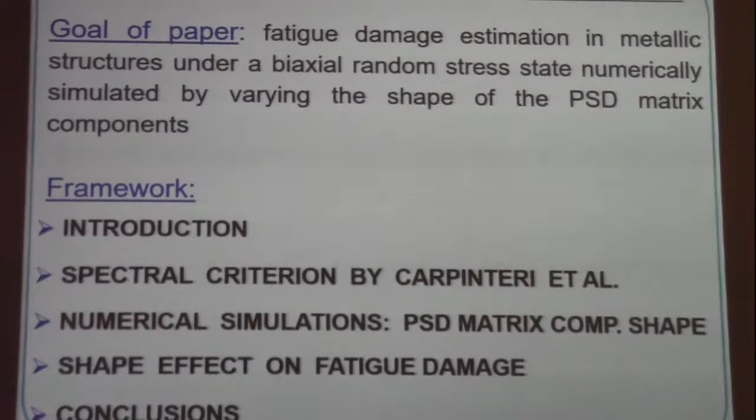The procedure usually employed in fatigue assessment of metallic structures under multi-axial random loading can be formulated in time domain or alternately in frequency domain. Time domain procedures are based on cycle counting methods and damage accumulation rules, and require knowledge of the time histories of the local stress-strain tensor components. Note that many records are needed to obtain reliable parameters of the loading process.

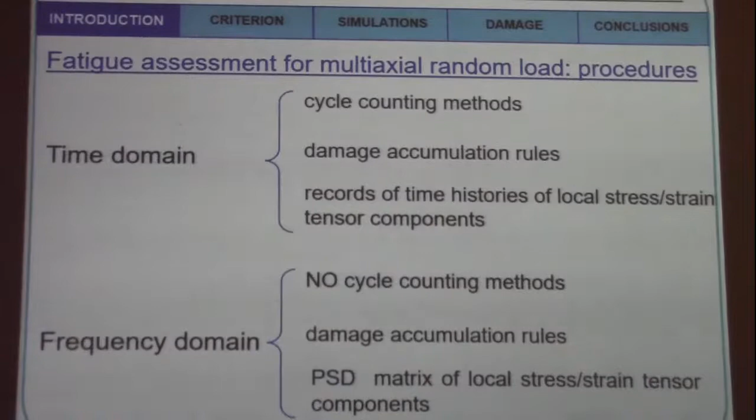Frequency domain procedures instead require no cycle counting methods. They need a damage accumulation rule, and starting from the power spectral density matrix of the local stress-strain tensor components, an evaluation of the fatigue damage can be directly obtained.

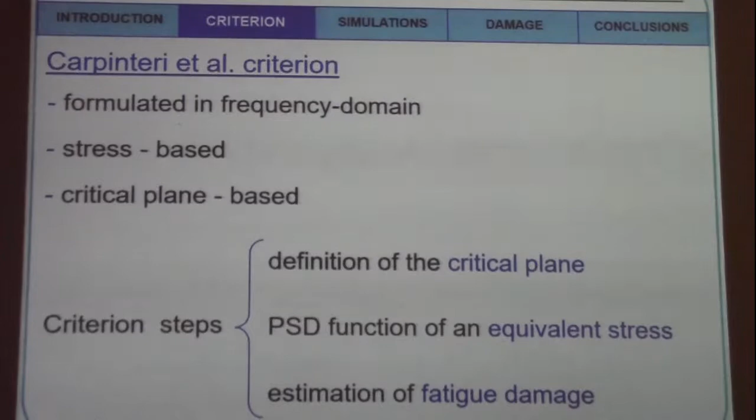The criterion here employed to estimate the fatigue damage, proposed by Carpinteri et al., is formulated in frequency domain and is a stress-based critical plane criterion consisting of three steps: definition of the critical plane, power spectral density function evaluation of an equivalent stress, and finally estimation of fatigue damage.

In order to determine the orientation of the critical plane, let us consider a material point P in the structural component subjected to a general multi-axial random loading. The stress tensor at point P with respect to the fixed frame XYZ is as reported.

By assuming that the random features can be described by a six-dimensional ergodic stationary Gaussian stochastic process with zero mean value, the power spectral density matrix at point P is as shown, where the coefficients are defined by means of the auto and cross correlation functions of the stress tensor components, where omega is the pulsation, lowercase t is the time, and capital T is the observation period.

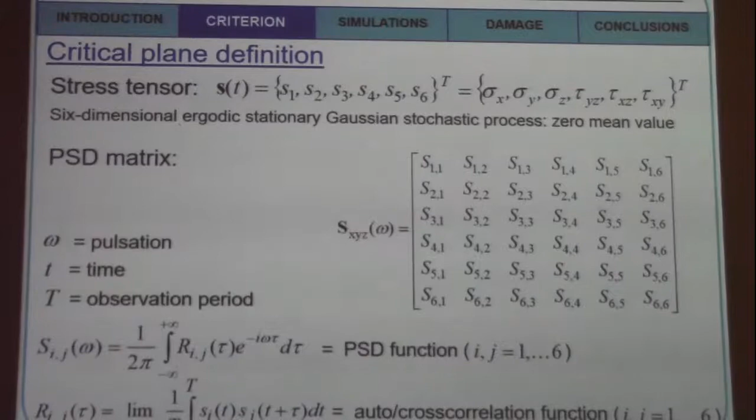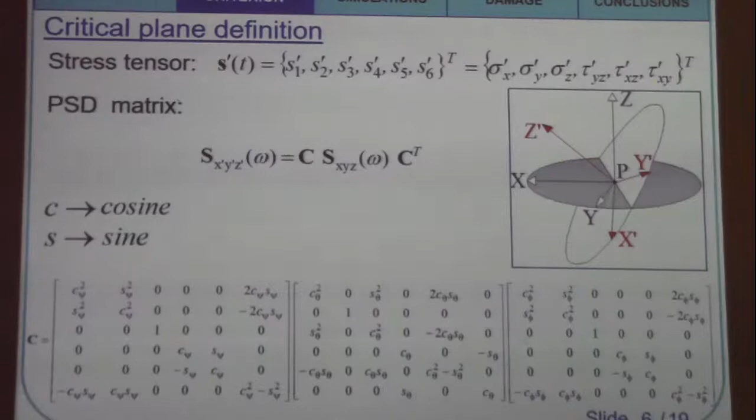Now let us consider a rotated frame, x prime, y prime, z prime, defined by the three Euler angles. The power spectral density matrix at point P with respect to such a frame can be computed using the rotation matrix C, reported at the bottom, where C stands for cosine function, S stands for sine function, and each subscript represents one of the three Euler angles.

The rotated frame x prime, y prime, z prime is assumed to be linked to the principal stress directions at point P. Since such directions are time-varying under random loading, we propose to define the following average principal stress directions: phi and theta are made to vary so that the direction z prime will experience the maximum of S3 prime in a statistical sense, where such a condition is shown, and where lambda 0 is the spectral moment of order 0 of the power spectral density function S3 prime.

nu 0 plus is the expected rate of mean zero-upcrossings of the stress S3 prime, and lambda 2 is the spectral moment of order 2 of the function S3 prime, 3 prime.

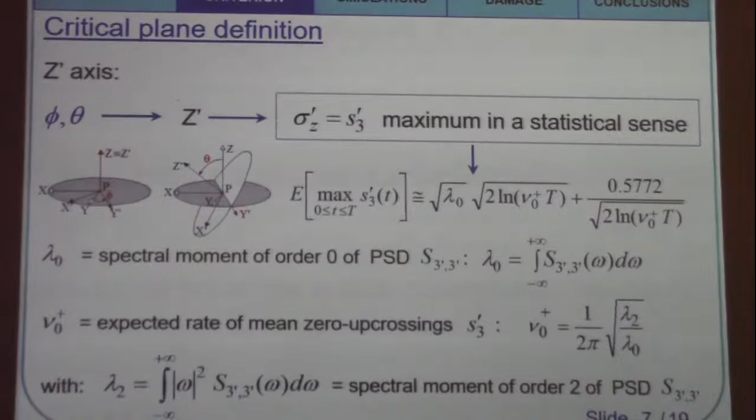The angle psi is made to vary in order to maximize the variance of the stress S4 prime. Note that the directions Z prime, Y prime are regarded as the average principal stress directions, 1-hat and 3-hat, and consequently the direction X prime is regarded as the average principal stress direction 2-hat.

The normal W to the critical plane is defined by the off-angle delta, being delta a clockwise rotation about axis 2-hat, and it is a function of the fully reversed shear and normal stress fatigue limits. Note that such a procedure agrees with the concept adopted in the original version of the criterion proposed by Carpinteri et al. for cyclic loading.

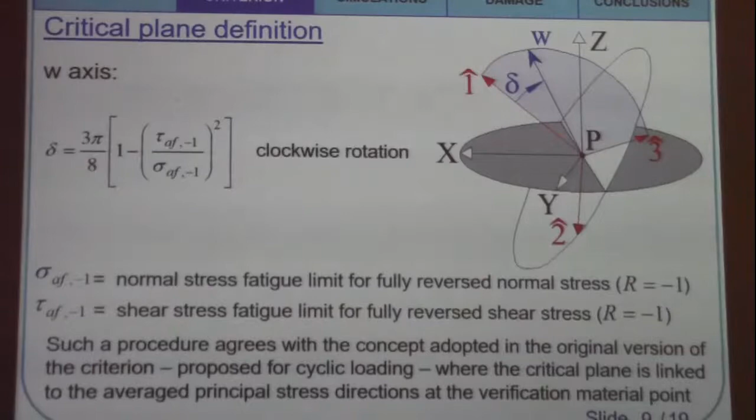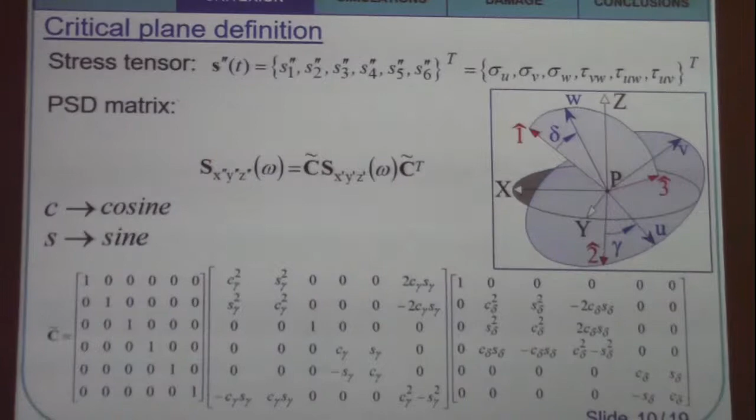And gamma, and consequently the direction U, is made to vary in order to maximize the variance of the stress S4''. The V-axis is finally normal to U so that U, V, W form a right-hand orthogonal frame.

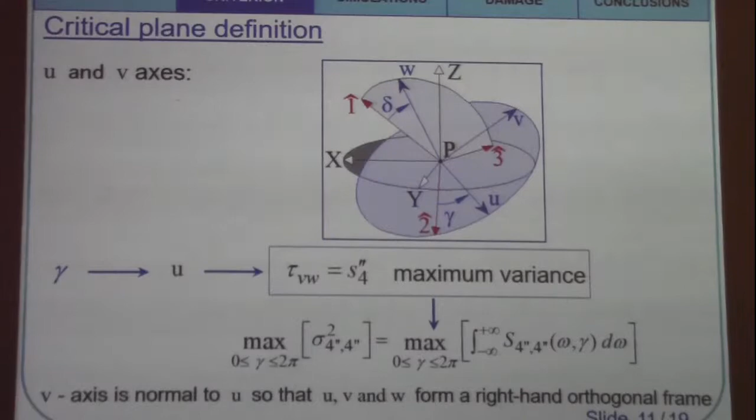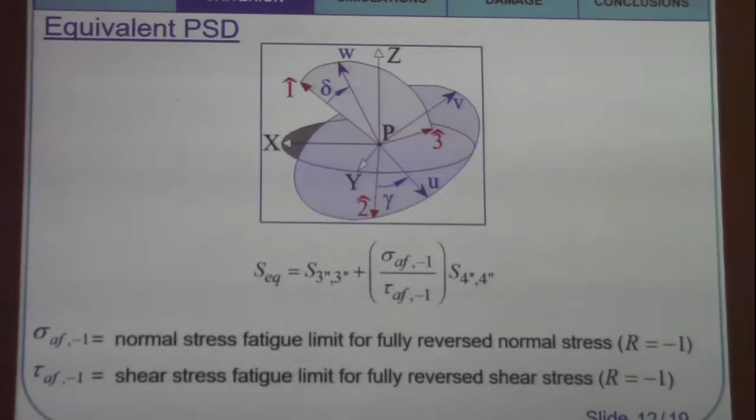Now, in order to reduce the multi-axial stress state to an equivalent one, we propose to compute the power spectral density function related to an equivalent stress connected to the critical plane by means of the linear combination of the power spectral density functions shown.

Then the fatigue damage estimation is performed. Such an estimation depends on the algorithm used to count the loading cycles.

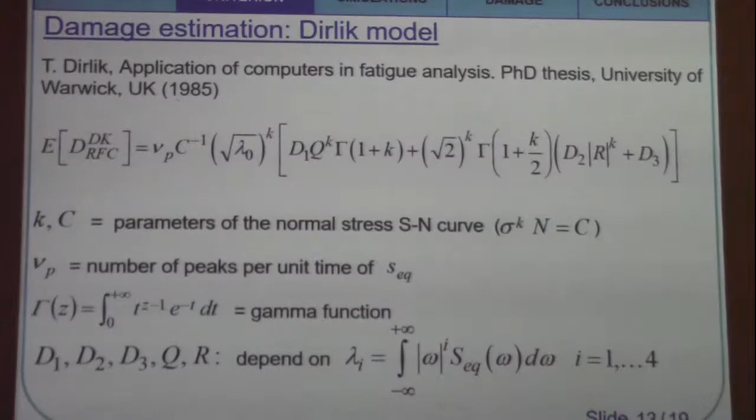The expected fatigue damage per unit time can be computed by using the formulation proposed by Dirlik and here shown, where K and C are the parameters of the material normal stress SN curve, ν P is the number of peaks per unit time of the equivalent stress SEQ, gamma is the gamma function, and D1, D2, D3, Q, and R are fitting parameters depending on the first 4 spectral moments of the power spectral density function SEQ.

A wide group of combined bending and torsion input signals is analyzed by varying the shape of the power spectral density matrix components.

Under a biaxial stress state, the power spectral density matrix is as shown, where the coefficients on the principal diagonal are autospectral density functions and are real functions, whereas the other components are cross-spectral density functions and are called complex functions.

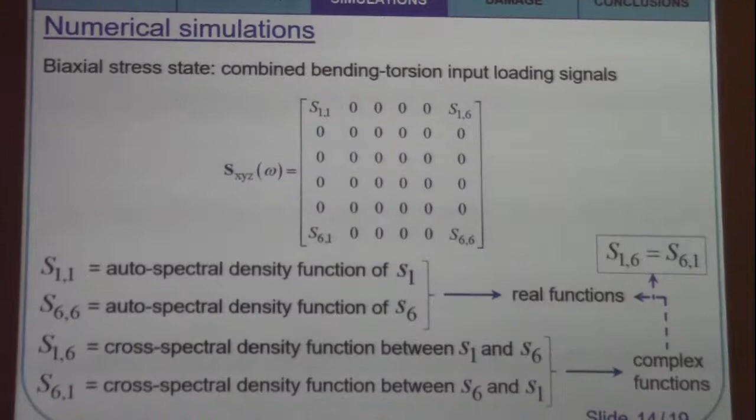In the present numerical simulation, we assume that the stresses S1 and S6 are in phase, so the cross-spectral density functions are real functions, and the power spectral density matrix is a symmetric matrix.

3 different shapes are analyzed for the spectrum S11 and S66, as shown more precisely: a triangular shape named spectrum of type 1, another triangular shape named spectrum of type 2, and a rectangular shape named spectrum of type 3.

Independent of the shape, such spectra are characterized by the same input energy, the energy being proportional to the area under each power spectral density function.

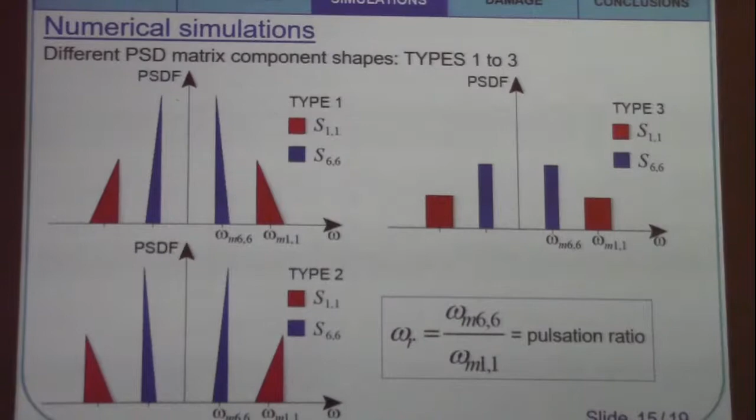The median pulsation of the spectrum S11, named omega M11, is assumed to be fixed, whereas the median pulsation of the spectrum S66, named omega M66, is made to vary so that different values of the pulsation ratio are analyzed.

Now let us consider, for example, the spectrum of type 1 by shifting omega M66 from left to right. 3 different types of input signals are generated, more precisely: input signals totally uncorrelated, input signals partially correlated, and input signals fully correlated. The values of S11 are assumed to be fixed, whereas the values of S66 are computed.

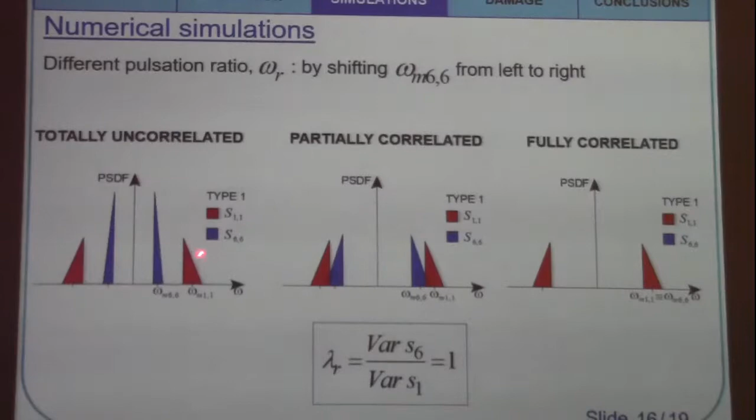The ratio between the variance of the stress S6 over the variance of the stress S1 is a constant and equal to 1, that is to say, the area under S66 is equal to the area under S11.

The values of S16, and consequently S61, depend on the relative position of S11 and S66, and more precisely, S16 is different from 0 when S11 and S66 overlap, and 0 otherwise.

The values of S16 are calculated by introducing a parameter named coherence, whose expression is shown at the bottom. More precisely, C16 is equal to 0 for input signals totally uncorrelated, by definition. For the present numerical simulation and partially correlated input signals, C16 is assumed to be equal to 0.8, whereas for fully correlated input signals, C16 is equal to 1, by definition.

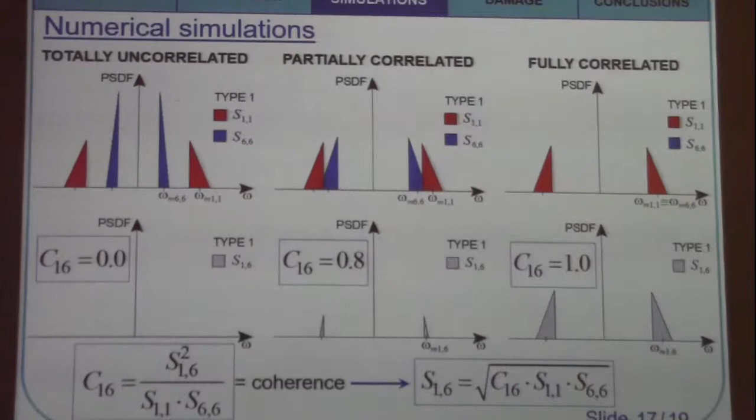The damage estimation is performed for the above input signals by using the spectral criteria proposed by Carpinteri et al., for proportional signals and for non-proportional signals.

In the case of fully correlated signals, the expected fatigue damage for unit time is here shown against the pulsation ratio. It can be observed that for fully correlated signals, the greater damage is that for the spectrum of type 2, which is only 1.1 times greater than the damage for the spectrum of type 1.

For totally uncorrelated signals, both the spectra of type 1 and type 2 produce the same damage, which is lower, up to 5 times, with respect to the damage for the spectrum of type 3, for omega r equal to 0.1, and decreasing up to 1.2 by increasing the pulsation ratio.

And finally, for partially correlated signals, the greater damage is that for the spectrum of type 2, which is only 1.1 times greater than the damage for the spectrum of type 1.

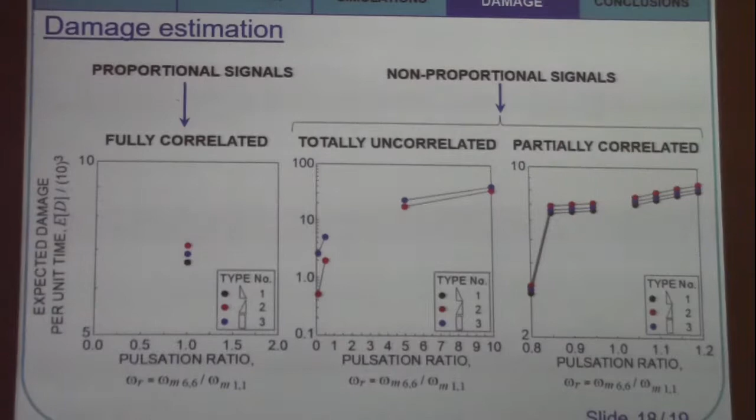And now let us move to the conclusions.

The influence of the shape value of the power spectral density matrix components on fatigue damage has been studied by employing the spectral criterion proposed by Carpinteri et al.

It has been observed that for fully correlated signals, the damage is almost independent of the shape of the power spectral density matrix components. For non-proportional loading and totally uncorrelated signals, triangular spectra are more harmful the lower the pulsation ratio is, and for non-proportional signals and partially correlated signals, the damage is almost independent of the shape of the power spectral density matrix components.